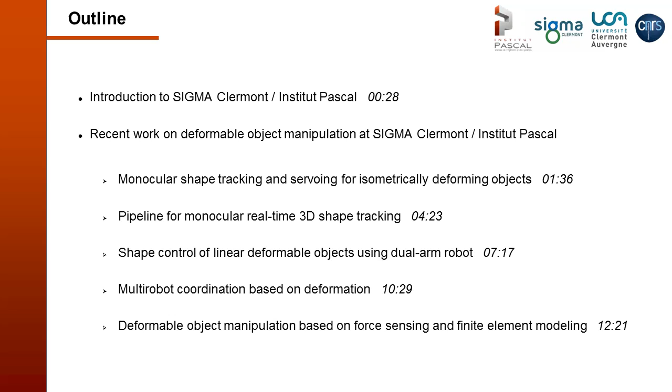This video presents recent work on deformable object manipulation at the Sigma Clermont Institut Pascal. This is the outline of the video, with timestamps for each of its parts. We will first briefly introduce Sigma Clermont and Institut Pascal. Then we will present some of the recent research work on the manipulation of deformable objects.

Institut Pascal is a joint interdisciplinary research and training unit in Clermont-Ferrand in France. It is under the supervision of three institutions: Sigma Clermont, which is a school of engineering, the University of Clermont-Auvergne, and CNRS. Three of the organizers of the workshop are members of Institut Pascal: Miguel Aranda, Juan Antonio Corrales, and Youcef Mezouar. Within the structure of Institut Pascal, we are part of the ISPR department, which stands for Image Perception Systems and Robotics.

Institut Pascal is involved in multiple research and development projects on the topic of manipulation of deformable objects, both at the French level and internationally. We are particularly interested in the application of this research to industrial tasks. There are two ongoing projects at European level coordinated by Sigma Clermont. One of them is the H2020 project SoftmanBot, and the other is the project COMMANDIA from the Sudoe Programme.

I'm going to discuss some work on monocular shape tracking and servoing. We address the problem of shape servoing, which means controlling the shape of a deformable object with robots using sensory feedback. In particular, we want to do servoing of the full 3D shape of the object with a monocular camera. The main challenges here are inferring the 3D shape of the object from monocular images, the presence of visual occlusions, the high underactuation in the control of the shape of the object, and the fact that the deformation is difficult to predict accurately.

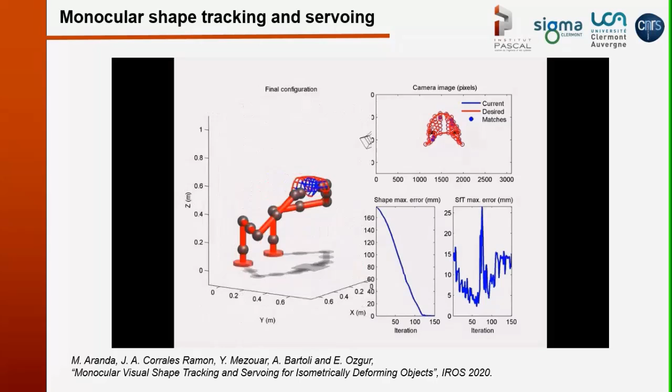You can find more details about this work in the paper, which is presented in the main conference.

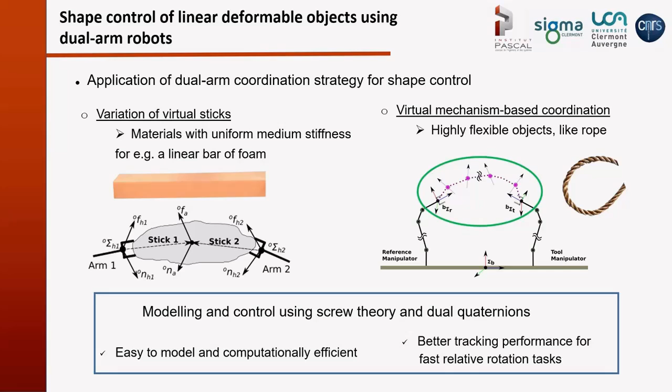The novelty for both kinds of shape control lies in the use of screw theory for the modeling of manipulators and for the modeling of virtual mechanisms, along with its representation using dual quaternions. Such a strategy leads to computational and storage efficiency and ease of modeling of mechanism, in addition to natural consideration of relative rotation between the arms, and thus improves performance for faster operations compared to existing approaches.

In this video, the ends of the virtual stick are pointing towards the center of the foam, and a relative rotation along an axis perpendicular to the object is provided by the two arms. In this video, the tips are pointing at a new location away from the center for generating a desired shape.

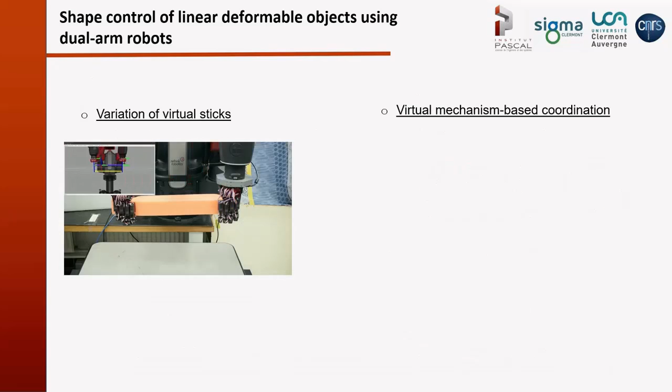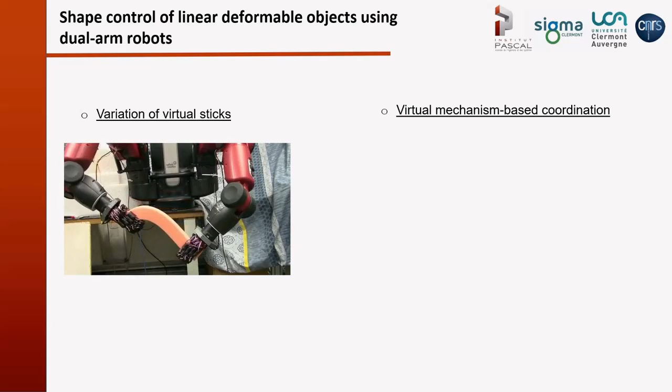If the object has enough stiffness, more complex shapes can be generated. Here, we were able to achieve an S shape by moving the tips of the virtual sticks successively. This kind of strategy can be useful for manipulating objects for packaging purposes.

In this experiment, we achieved a U shape with a rope that is being manipulated under physical constraint. The constraints were represented using serial mechanism with two rotational joints. Along with the generation of relative motion using virtual mechanisms, we were also maintaining the same absolute position, that is the center of the rope, throughout the operation.

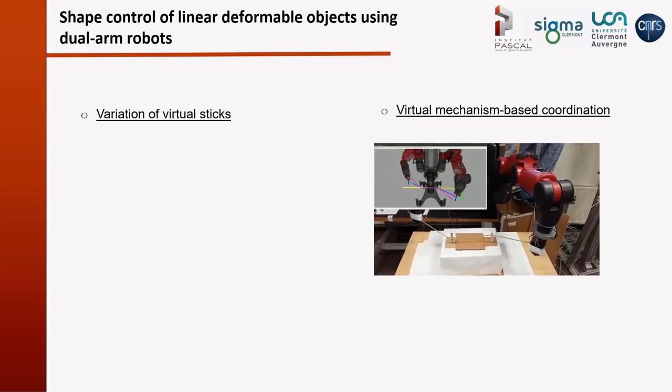We achieve S shape in this experiment with the same mechanism but by giving opposing rotation to the two joints of the virtual mechanism. In the future, we would like to close the shape control loop with vision to obtain the ends of virtual sticks for the first strategy and the definition of virtual mechanism for the second strategy to represent the kinematic constraints.

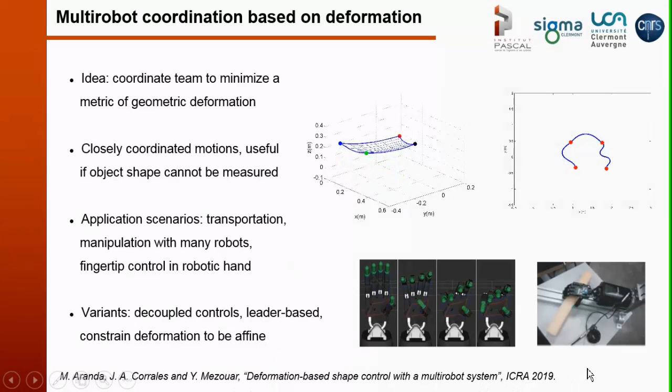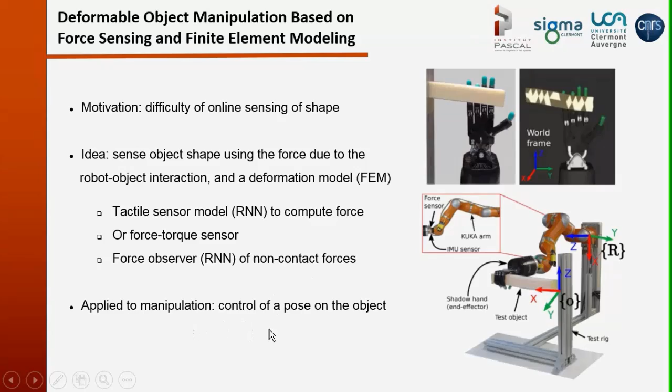The proposed shape sensing pipeline was also applied to a task of manipulating an object controlling its deformation. The video first shows deformation sensing experiments displaying the shape estimated with the simulated model.

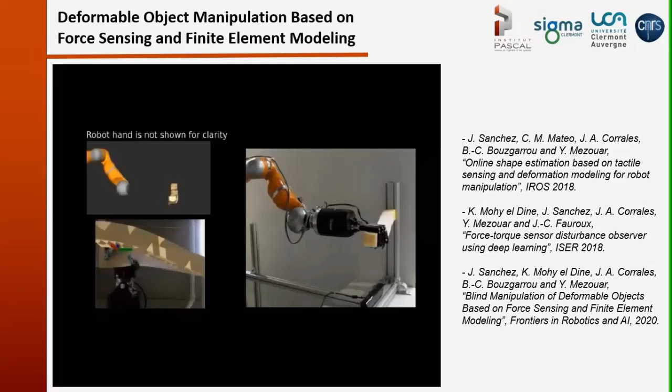Now the video shows results of controlling a pose on the object.